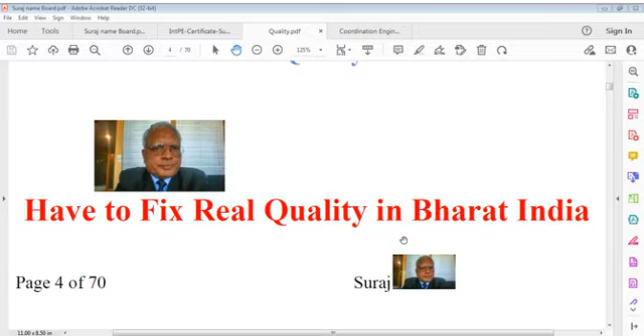And that's what I say. It's not that I'm defining this, you know it very well. I'm just trying to refresh and tell you that it is known, you are forgetting, please don't forget. Fixation of real quality is very important in every country, and we are not remote from others. If we don't keep quality, people would know we are not a quality nation, and there can be no excuse given that we could not do it. This is reason. No other reason plays a role.

Quality is not being produced, I don't know why it's happening. Despite having millions of engineers in our country, quality is not coming out, particularly in production and manufacturing. It may be civil construction, EME construction, digital construction, or whatever - manufacturing of steel, manufacturing of other items or products - there can be no guarantee given to quality. What's happening, how it's happening, why we are not serious - these questions are demanding answers. We are not answering these questions, and that is where we fail.

I simply say no excuse for whatever concession is demanded. There can be no excuse that can be accepted, because quality is a requirement, and quality requirement cannot be compromised. We can't compromise anything just in the name of certain documents we have. We cannot say, 'we have got quality certification and you should accept what I'm saying, what I'm giving you.' That is not acceptable, because I have to be sure with confirmation that the product is a quality one. And if I am not sure, I don't care for your system, because systems are only systems. Systems don't have a living entity. Systems are just referrals. What we are talking of is the living entity in production, in manufacturing.

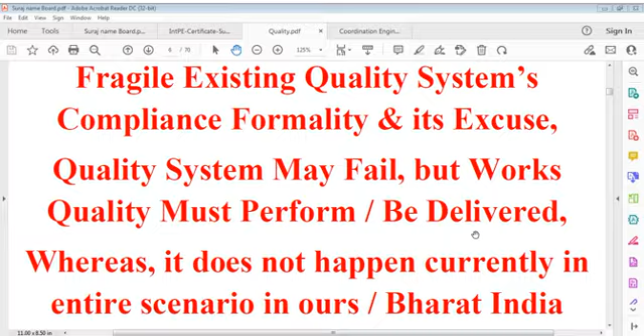When people are careless, there are formations of various lines which may be called red lines. Red lines mean something missing or something being done wrong. We have to do it right, and that's what we say, something should be like that.

Every day I say we have to see, can we know and apply product and works quality standards complied with international standards, or at least our own standards. When we say international standards, this is nothing very extraordinary. Everything is internationalized in this world. We consume products of other countries, and other countries might have consumed our product.

This could happen. People move from one place to another, and the same way commodities move. Same way I worked in many countries because of that reason. Of course it is economical relation, or you can say it is some other relation. We have to move on, we have to move forward.

Then what is the question? Can we work on required coordination, bearing activities to achieve defined or expected quality profile on work? That's the point. Where do we fail? And if we fail, why do we fail? Why don't we control ourselves?

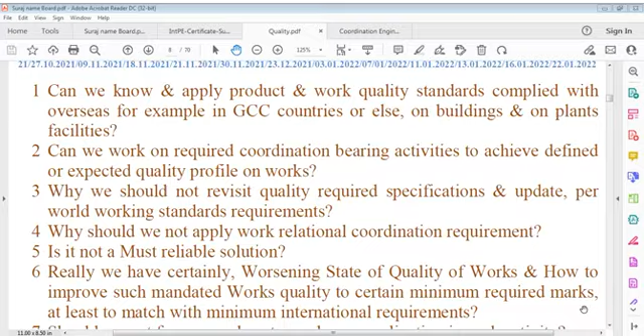Why should we not apply work relational coordination requirements? Why? Question again comes, why? Why should we not apply work relational coordination requirement? Do you think it's not a must? Is it not a requirement? Is it not a reliable solution?

We have certainly a worsening state of quality of works, and how to improve such mandated works quality to certain minimum required marks, at least to match minimum international requirements, or whatever requirements we agree for. We have to force ourselves, should we not? We have to force ourselves to work on coordination in each activity. Is it wrong? Answer yourself. Why is it wrong? Why should it not be done?

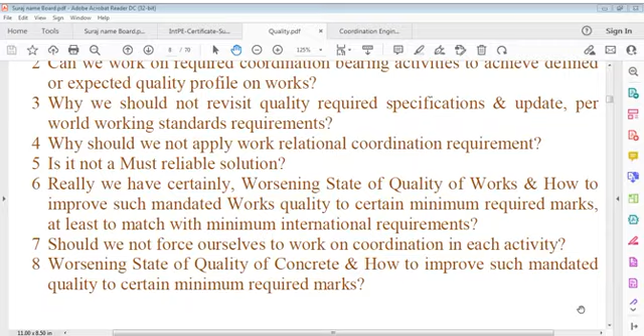Worsening state of quality of concrete, and why don't we do that? Concrete is very important component in construction work, because concrete is important everywhere. Without concrete, no project can be successful, no project can be delivered. That is quality, concrete quality, you may say.

When we say concrete itself, this means strong material, artificial stone you may call it. Concrete component in construction amounts to a major part or major percentage of cost, and for that reason it becomes incumbent on us to care about the quality of such component. Why don't we care about it? Understanding says we have to be very serious in this regard, and we should not avoid its importance.

Worsening state means worsening state of communication, worsening state of coordination. Both jointly lead to a worsening state of quality achievement. That is a very significant point. We have to make ourselves available to think and to consider. That point we have to be very serious about. Why not be serious about that point?

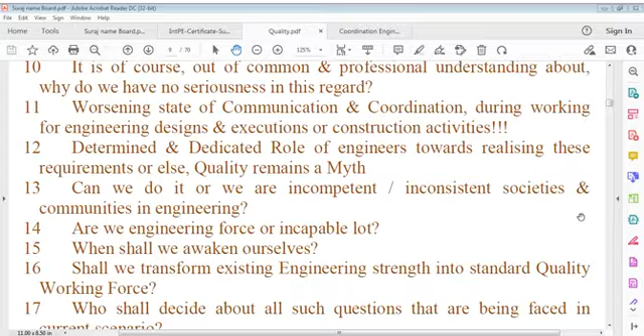Worsening state of communication and coordination during working for engineering designs and executions or construction activities. Determined and dedicated role of engineers towards realizing these requirements, or else quality remains a myth and not a fact, not a realization milestone. Can we do it? Or are we incompetent and inconsistent societies and communities in engineering? We have to think, are we an engineering force or an incapable lot? That is also something we have to decide.

Shall we? Shall we? Shall we do what we say? My point of view is, shall we do what we say, or are we sleeping partners? Can we do it, or are we incompetent, inconsistent societies and communities in engineering? Are we an engineering force or an incapable lot?

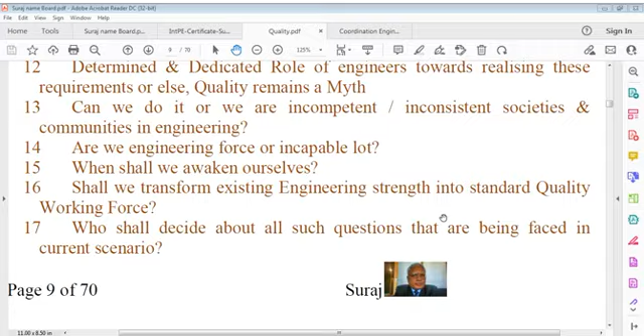Deliberations must happen every time we discuss this; there should be no deficiency, there should be no slack, because deliberation should be continuous. As you know, technologies keep changing, working practices keep changing, and speeds keep changing, but the basics are the same. You have to keep that.

Information must be brought to those personnel who require it. It must be provided at the right time for the right requirement, and duly coordinated. Without coordination, information has got no meaning. It can be an error, or it can cause error on works, and errors are sometimes very expensive and time consuming. These should be avoided.

Dissemination of engineering information about quality requirement and coordination requirement must be clear. The concept should be clear, the requirement should be clear, its methodology should be clear, dissemination of engineering information about quality requirements, and how to transform using method statements.

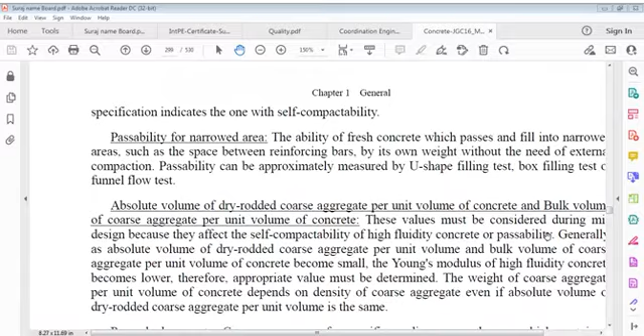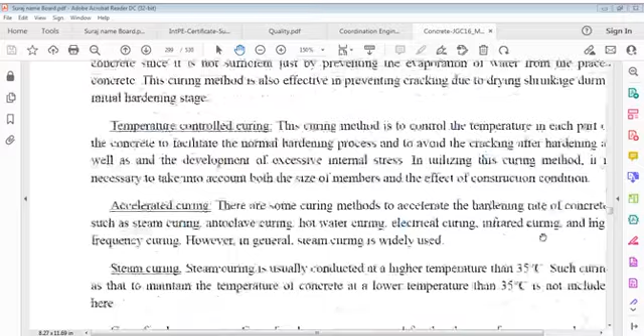Let's have a little revision of 2 or 3 points here. Hot concrete of a temperature of 40 to 60 degrees Celsius is used to place in formwork, and it will be removed from the form in a short time after hard curing - that is called hard concrete. Its temperature range is 40 to 60 degrees Celsius, used to place in a formwork and remove form in a short time after hard curing.

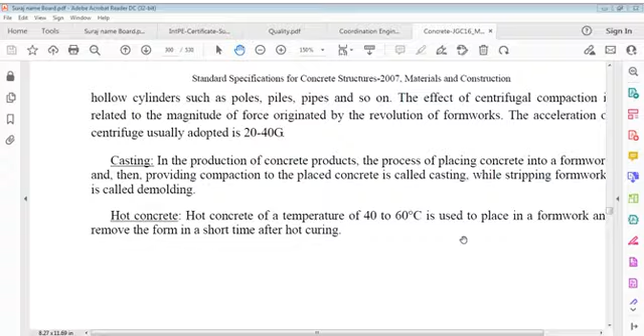Casting in production of concrete products: the process of placing concrete into a formwork and then providing compaction to the placed concrete is called casting, while stripping formworks is called demolding. Again, casting is the production of concrete, the process of placing concrete into formwork and providing compaction to that placed concrete, and removing or stripping the form is called demolding.

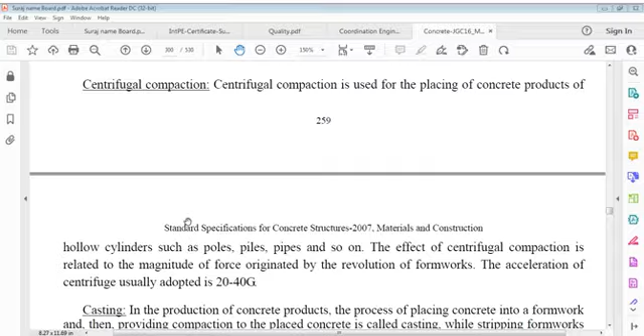Means placing of concrete products of hollow cylinders such as poles, piles, pipes, and so on. Effect of centrifugal compaction is related to magnitude of force originated by revolution of formwork. Acceleration of centrifuge usually adopted is 20 to 40 G.

And then we have steam curing. Steam curing is usually conducted at higher temperature than 35 degrees Celsius. Such curing is that to maintain temperature of concrete at a lower level, lower than 35 degrees Celsius, is not included here, usually higher than 35 degrees.

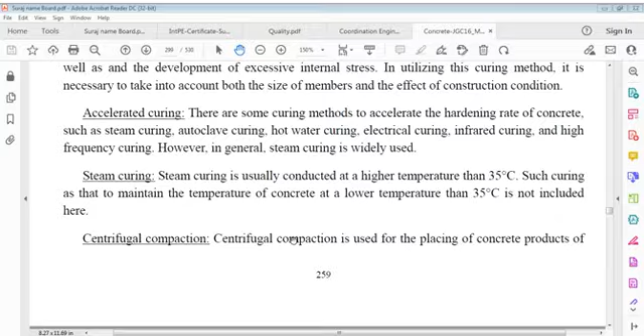Accelerated curing, some curing methods to accelerate hardening rate of concrete, such as steam curing, autoclave curing, hot water curing, electrical curing, infrared curing, and high frequency curing. However, in general, steam curing is widely used.

Temperature control curing. This curing method is to control temperature in each part of concrete to facilitate normal hardening process and to avoid cracking after hardening, as well as development of excessive internal stress. In utilizing this curing method, it is necessary to take into account both size of members and effect of construction condition.

Then we have moist curing. You know it very well. Ensure necessary amount of water for hydration of cement in concrete, since it is not sufficient just by preventing evaporation of water from placed concrete. This curing method is also effective in preventing cracking due to drying shrinkage.

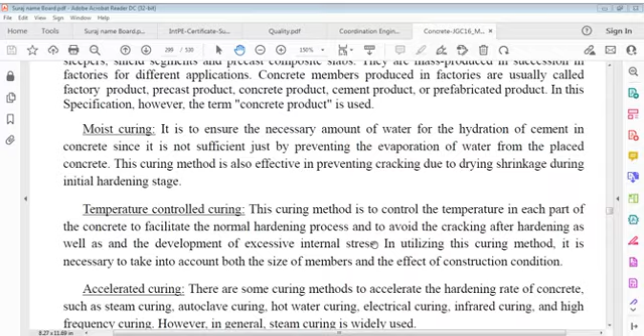Concrete products. Very complex actually. It's not that as we think so.

Concrete products, some examples are Hume pipes, piles, blocks, railroad sleepers, shield segments, and precast composite slabs. They are mass produced in succession in factories for different applications. Concrete members produced in factories are usually called factory product, precast product, concrete product, cement product, or prefabricated product.

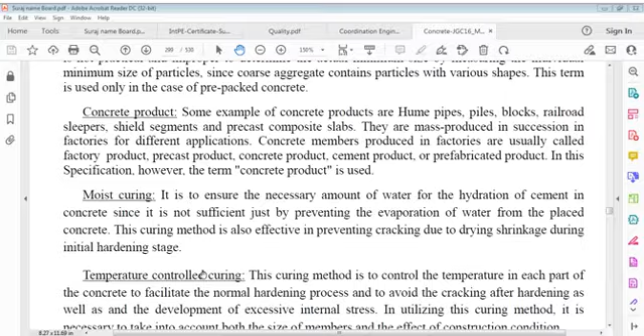In this specific chapter, that is chapter 2, expansive concrete. What is expansive concrete? We have to understand essential matters particularly required for achieving qualities and performances of expansive concrete.

Expansive concretes referred to in this chapter are shrinkage compensating concrete, and is general term for a type of concrete which consists of expansive admixture mixed together with cement, water, fine aggregate, coarse aggregate, and other admixtures, and which possesses volume expansion even after start of hardening.

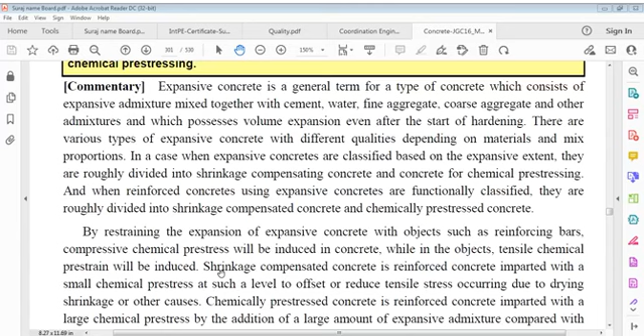There are various types of expansive concrete and different qualities depending on materials and mix proportions. In case when expensive concretes are classified based on expansive extent, roughly divided into shrinkage compensating concrete and concrete for chemical pre-stressing. When reinforced concrete using expansive concretes are functionally classified, these are roughly divided into shrinkage compensated concrete and chemically pre-stressed concrete.

By restraining expansion of expansive concrete with objects such as reinforcing bars, compressive chemical pre-stress shall be induced in concrete, while in objects, tensile chemical pre-strain shall be induced.

Shrinkage compensated concrete is reinforced concrete imparted with small chemical pre-stress at such a level to offset or reduce tensile stress occurring due to drying, shrinkage, or other causes. Chemically pre-stressed concrete is reinforced concrete imparted with a large chemical pre-stress by addition of large amount of expansive admixture compared with that in shrinkage compensated concrete, so that chemical pre-stress remains even when drying shrinkage has been offset.

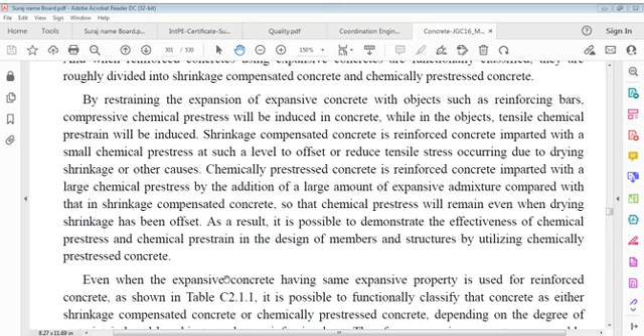It is possible to demonstrate effectiveness of chemical pre-stress and chemical pre-strain in design of members and structures by utilizing chemically pre-stressed concrete. Even when expansive concrete having same expansive property is used for reinforced concrete, it is possible to functionally classify that concrete as either shrinkage compensated one or chemically pre-stressed concrete, depending on degree of restraint induced by objects such as reinforcing bars.

Therefore, expansive concretes are roughly divided into shrinkage compensating concrete and chemical pre-stressing concrete based on expansive capacity, which is totally different from classification based on function.

In chemical pre-stressing concrete, strength loss due to expansive action shall not occur if proper restraining objects are provided. If provisions of restraining objects is improper, strength loss shall occur. In contrast, for shrinkage compensating concrete, expansive admixture is used in such an amount that obtained concrete strength is almost equal to that of concrete with same water binder ratio and without expansive admixture in mix proportion.

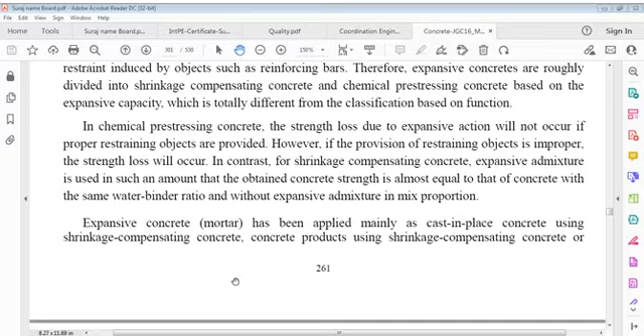Expansive concrete mortar has been applied mainly as cast in situ, cast in place concrete using shrinkage compensating concrete or chemical pre-stressing concrete, various fill concrete and mortar for filling voids in inverse lining or below bridge bearing. Chemical pre-stressing concrete is also used for cast in place concrete.

When using expansive concrete, materials, mixed proportions, production methods, quality management methods, and construction methods should be determined so as to produce the designated quality.

Expansivity of expansive concrete varies according to the type of expansive admixture or cement used, the amount of expansive admixture per unit volume of concrete, age, curing methods, environment of the structure, and dimensions of the member cross section. Performance requirements for expansive concrete vary according to whether shrinkage compensating or chemical pre-stressing concrete is used.

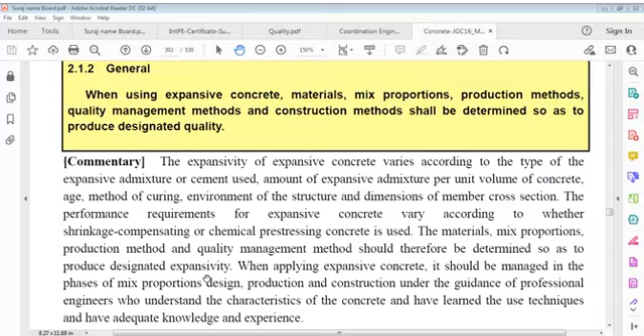Materials, mixed proportions, production methods, and quality management methods should therefore be determined so as to produce the designated expansivity. When applying expansive concrete, it should be managed in phases of mix proportion design, production, and construction under the guidance of professional engineers who understand the characteristics of concrete and have adequate knowledge and experience.

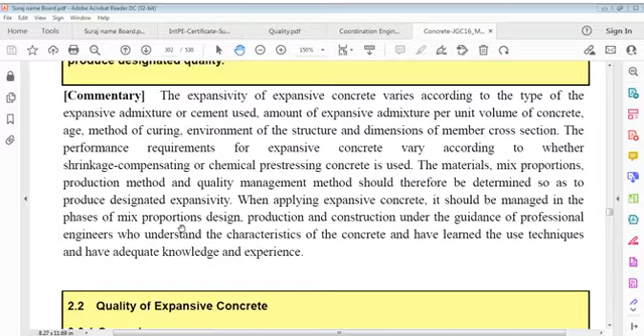Quality of expansive concrete: expansive concrete shall meet performance requirements in terms of workability, strength, expansivity, durability, water tightness, and steel protection. Variations of quality shall be minimized.

Expansive concrete, as well as ordinary concrete, should have designated workability and expansivity with minimum variations. Variations of expansivity may prevent shrinkage compensation or application of chemical pre-stress from producing an intended effect, or lead to strength reduction due to excessive expansion. Quality of expansive concrete should therefore be fully managed.

Expansivity of expansive concrete should be expressed as a rate of expansion obtained in accordance with JIS A 6202. The test value at an age of 7 days shown in the attachment should be used as the standard value. The standard range of expansion coefficient of expansive concrete is shown.

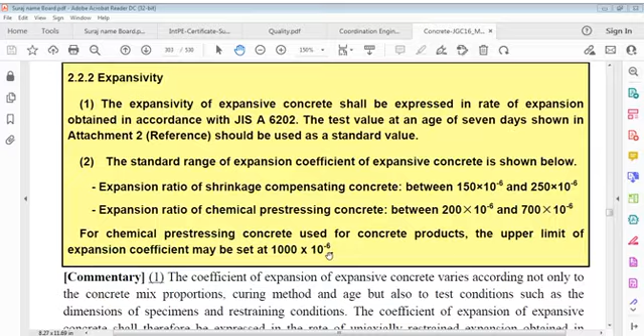For chemical pre-stressing concrete used in concrete products, the upper limit of the expansion coefficient may be set at 1000 into 10 to the power minus 6.

Coefficient of expansion of expansive concrete varies not only according to concrete mix proportions, curing methods, and age, but also to test conditions such as dimensions of specimen and restraining condition. Coefficient of expansion of expansive concrete shall therefore be expressed as the rate of uniaxially restrained expansion.

Coefficient of expansion of expansive concrete varies according not only to concrete mix proportions, curing method, and age, but also to test conditions such as dimensions of specimen and restraining conditions. Coefficient of expansion of expansive concrete should therefore be expressed as the rate of uniaxially restrained expansion obtained in accordance with the attachment.

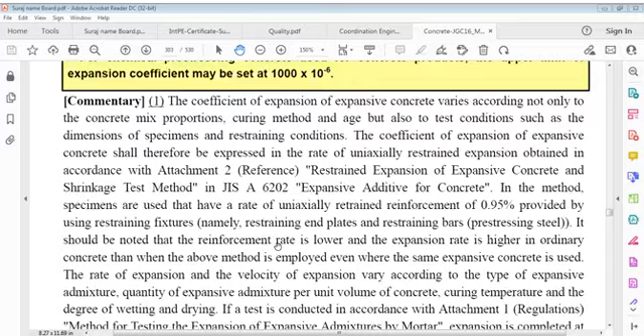It should be noted that the reinforcement rate is lower and the expansion rate is higher in ordinary concrete than when this method is employed, even where the same expansive concrete is used.

Rate of expansion and velocity of expansion vary according to the type of expansive admixture, the quantity of expansive admixture per unit volume of concrete, curing temperature, and degree of wetting and drying.

If a test is conducted in accordance with the attachment method for testing expansion of expansive admixtures by mortar, expansion is completed at an age of 7 days. The rate of expansion is therefore expressed as the uniaxially restrained expansion rate at an age of 7 days.

Also, if a test is conducted in accordance with the Attachment 1 method for testing expansion of expansive admixtures by mortar, expansion is completed at an age of 7 days. The rate of expansion is therefore expressed as the uniaxially restrained expansion rate at an age of 7 days.

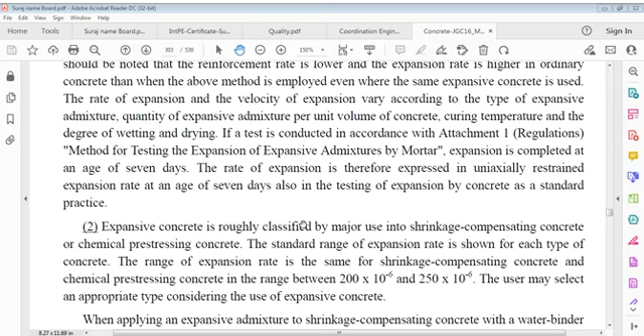Also in testing of expansion by concrete as a standard practice, expansive concrete is roughly classified by major use into shrinkage compensating concrete or chemical pre-stress concrete. The standard range of expansion rate is shown for each type of concrete.

The range of expansion is the same for shrinkage compensating concrete and chemical pre-stressing concrete, in the range between 200 into 10 to the power minus 6 and 250 into 10 to the power minus 6. The user may select an appropriate type considering the use of expansive concrete.

When applying an expansive admixture to shrinkage compensating concrete with a water binder ratio of 30% or lower, such as high strength concrete and high fluidity concrete, expansion may be controlled at an early age because of lack of water required for hydration of the expansive admixture.

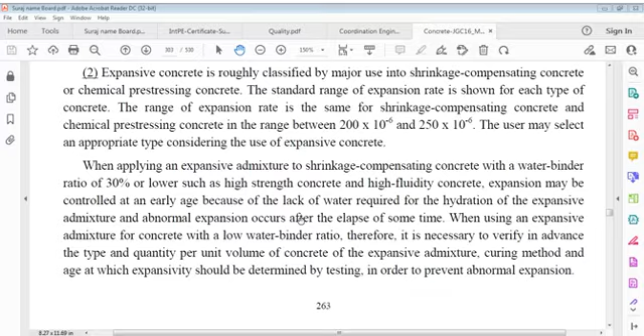In chemical pre-stressing concrete, inappropriate arrangement of reinforcing bars or steel pipes for restraining expansion not only prevents development of effective chemical pre-stress but also deteriorates quality of the expansive concrete.

What does it say? In chemical pre-stressing concrete, inappropriate arrangement of reinforcing bars or steel pipes for restraining expansion.

In chemical pre-stressing concrete, inappropriate arrangement of reinforcing bars or steel pipes for restraining expansion not only prevents development of effective chemical pre-stress but also deteriorates quality of the expansive concrete.

Area and arrangement of reinforcing bars when using chemical pre-stressing concrete should be determined considering expansivity of concrete, type of structure, characteristics of loads, dimensions of members, and construction method.

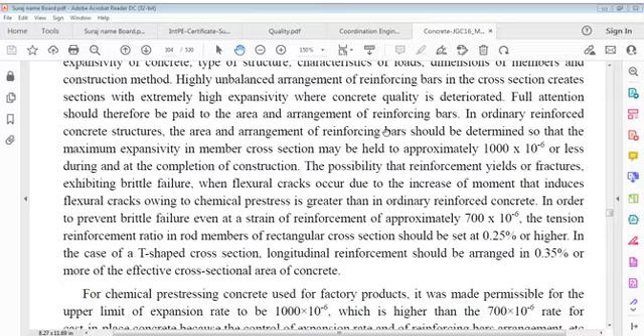In order to prevent brittle failure even at strain of reinforcement of approximately 700 times 10 to the power minus 6, tension reinforcement ratio in members of rectangular cross section should be 0.25% or higher. In case of T-shaped cross section, longitudinal reinforcement should be arranged in 0.35% or more of effective cross-sectional area of concrete.

For chemical pre-stressing concrete used for factory products, it was made permissible for the upper limit of expansion rate to be 1000 times 10 to the power minus 6, which is higher than the 700 times 10 to the power minus 6 rate for cast-in-place concrete, because control of expansion rate and of reinforcing bar arrangement, etc. on factory products is superior compared to other cast-in-place methods.

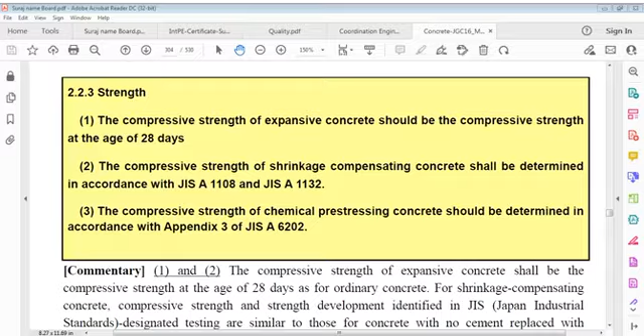Compressive strength of expansive concrete should be compressive strength at age of 28 days. Compressive strength of shrinkage compensating concrete and chemical pre-stressing should be determined in accordance with this, as compressive strength at age of 28 days, as for ordinary concrete.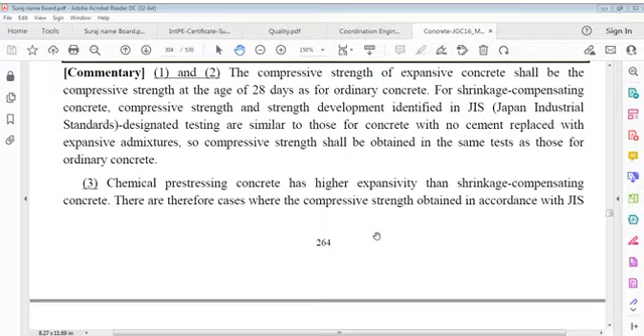For shrinkage compensating concrete, compressive strength and strength development designated to testing similar to those for concrete with no cement replaced with expansive admixtures. So compressive strength shall be obtained in same tests as those for ordinary concrete. Chemical prestressing concrete has higher expansivity than shrinkage compensating concrete.

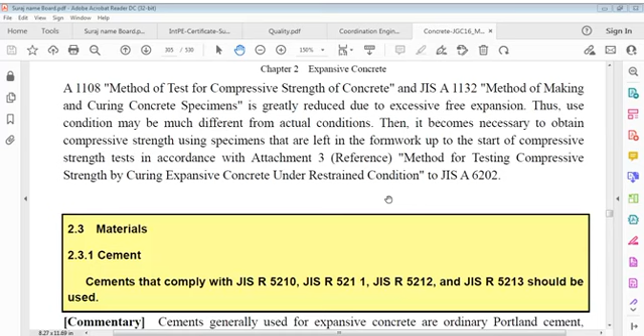There are cases where compressive strength obtained in accordance with method of test for compressive strength of concrete, method of making and curing concrete specimen, is greatly reduced due to excessive free expansion. Thus, use condition may be much different from actual conditions. It becomes necessary to obtain compressive strength using specimens that are left in formwork up to start of compressive strength tests in accordance with method of testing compressive strength.

Cements that comply with this requirement. Cements generally used for expansive concrete are ordinary Portland cement, moderate heat Portland cement, and high early strength Portland cement, fly ash cement type B, and blast furnace slag cement type B.

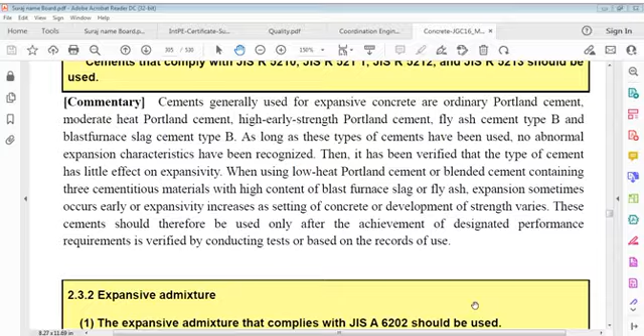These cements should therefore be used only after achievement of designated performance requirements is verified by conducting tests or based on records of use.

Expansive admixture that complies with this used. When using other expansive admixtures than those described above, their quality shall be verified and methods of use should be fully examined. Expansive admixtures shall be stored so as to maintain quality.

Expansive admixtures used for expansive concrete are divided into two major types according mainly to chemical composition: calcium sulfoaluminate, CSA type, and calcareous type, that is CaO type. In shrinkage compensating concrete using these types of admixtures, quantity of expansive admixtures per unit volume of concrete has conventionally been set to 30 kg per meter cube as standard.

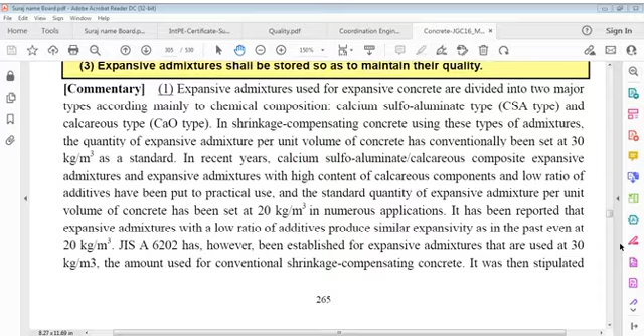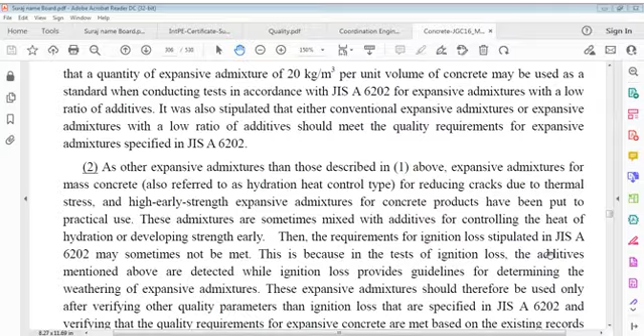It has been reported that expansive admixtures with a low ratio of additives produce similar expansivity as in the past, even at 20 kg per meter cube. However, it being established for expansive admixtures that are used at 30 kg per meter cube, the amount used for conventional shrinkage compensating concrete, it was stipulated that quantity of expansive admixture of 20 kg per meter cube per unit volume of concrete may be used as a standard when conducting tests for expansive admixtures with a low ratio of additives. It is also stipulated that either conventional expansive admixtures or expansive admixtures with a low ratio of additives should meet quality requirements for expansive admixtures.

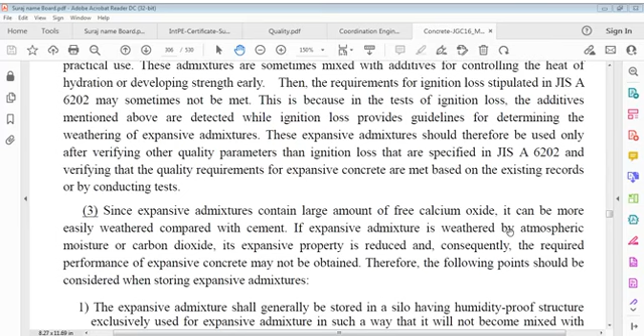Requirements for ignition loss stipulated may sometimes not be met. This is because in tests of ignition loss, additives mentioned above are detected, while the ignition loss provides guidelines for determining weathering of expansive admixtures. Expansive admixtures should therefore be used only after verifying quality parameters other than ignition loss, and verifying that quality requirements of expansive concrete are met based on existing records.

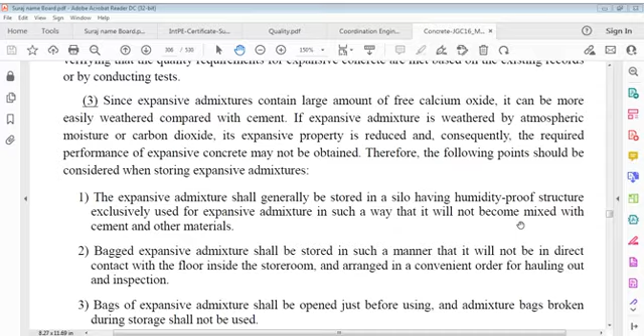Since expansive admixtures contain a large amount of free calcium oxide, they can be more easily weathered compared with cement. If an expansive admixture is weathered by atmospheric moisture or carbon dioxide, its expansive property is reduced, and consequently required performance of expansive concrete may not be obtained. Following points should be considered when storing expansive admixture. Expansive admixture shall generally be stored in a silo having humidity-proof structure, exclusively used for expansive admixture, in such a way that it shall not become mixed with cement and other materials. Bagged expansive admixture shall be stored in such a manner that it shall not be in direct contact with the floor, inside a storeroom, and arranged in a convenient order for hauling out and inspection. Bags of expansive admixture shall be opened just before using, and admixture bags broken during storage shall not be used. If storage period is relatively long, tests shall be performed before using.

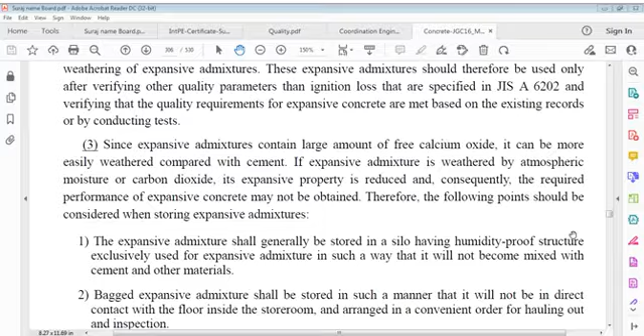Since expansive admixtures contain a large amount of free calcium oxide, they can be more easily weathered compared with cement. Expansive admixture is weathered by atmospheric moisture or carbon dioxide, its expansive property is reduced, and consequently required performance of expansive concrete may not be obtained. That's why following points should be considered. Expansive admixture shall be stored in a silo having humidity-proof structure, exclusively used for expansive admixture, in such a way that it shall not become mixed with cement or other materials. Bagged expansive admixture shall be stored in such a manner that it shall not be in direct contact with the floor, inside a storeroom, and arranged in a convenient order for hauling out and inspection. Bags of expansive admixture shall be opened just before using, and admixture bags broken during storage shall not be used. If storage period is relatively long, tests shall be performed before using, to confirm all required properties.

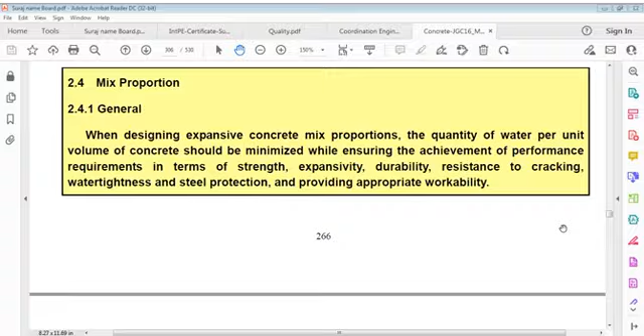Mix proportion: when designing expansive concrete mix proportions, quantity of water per unit volume of concrete should be minimized while ensuring achievement of performance requirements in terms of strength, expansivity, durability, resistance to cracking, water tightness, and steel protection, and providing appropriate workability. It's extremely important to minimize quantity of water per unit volume of expansive concrete as long as designated performance requirements are met, as for ordinary concrete.

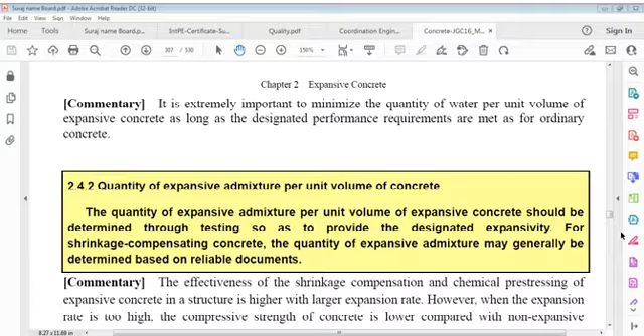Quantity of expansive admixture per unit volume of concrete should be determined through testing so as to provide designated expansivity for shrinkage compensating concrete. Quantity of expansive admixture may generally be determined based on reliable documents. Effectiveness of shrinkage compensation and chemical pre-stressing of expansive concrete in a structure is higher with larger expansion rate. However, when expansion rate is too high, compressive strength of concrete is lower compared with non-expansive concrete of the same mix proportions. That's why it's important to find an appropriate range of expansion rate within which strength declination does not occur.

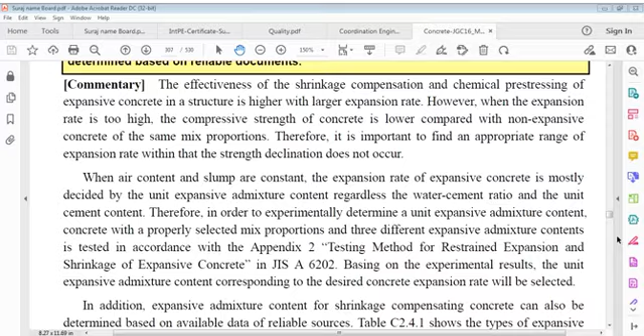When air content and slump are constant, expansion rate of expansive concrete is mostly decided by unit expansive admixture content, regardless of water cement ratio and unit cement content. In order to experimentally determine unit expansive admixture content, concrete with properly selected mix proportions and 3 different expansive admixture contents should be tested using the testing method for restrained expansion and shrinkage of expansive concrete. Based on experimental results, unit expansive admixture content corresponding to desired concrete expansion is to be selected. In addition, expansive admixture content for shrinkage compensating concrete can also be determined based on available data from reliable sources.

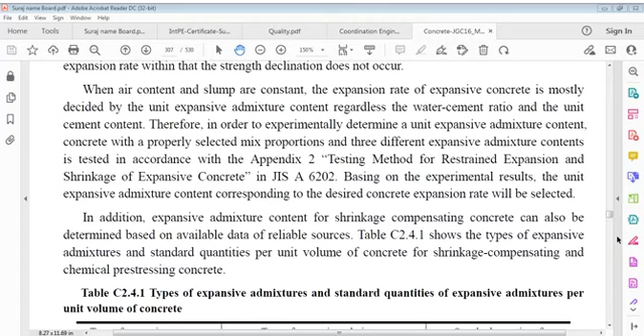Expansive admixture standard quantities per unit volume of concrete for shrinkage compensating and chemical pre-stressing concrete. Type of expansive admixtures and standard quantities of expansive admixtures per unit volume of concrete.

There is type of expansive concrete, column 1: type of expansive admixture for ordinary concrete for conventional type, and standard quantity of expansive admixture.

Type of expansive concrete includes shrinkage compensating concrete and chemical pre-stress concrete. In shrinkage compensating concrete, expansive admixture for ordinary concrete is conventional type with low ratio of additives. For mass concrete, it is also conventional type with low ratio of additives.

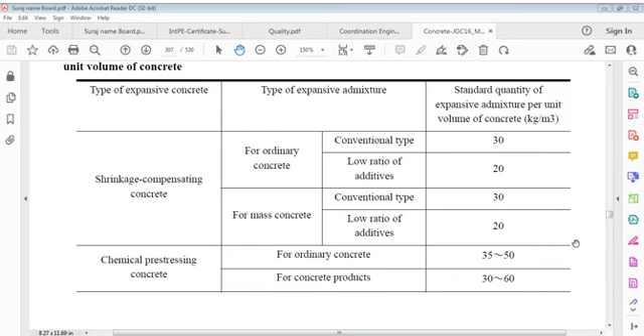Standard quantity of expansive admixture per unit volume of concrete, in kilogram per meter cube: for ordinary concrete, 30 kg for conventional type, and 20 kg for lower ratio of additives. For mass concrete, conventional type is 30 kilogram per meter cube and low ratio of additive is 20 kilogram per meter cube. For chemical pre-stressed concrete, ordinary concrete requires 35 to 50 kilogram per cubic meter, and for concrete product it can be 30 to 60.

Quantity of cement per unit volume of concrete. Standard quantity of cement per unit volume of expansive concrete should be 260 kg per meter cube or larger.

Strength and rate of expansion of expansive concrete are determined by...

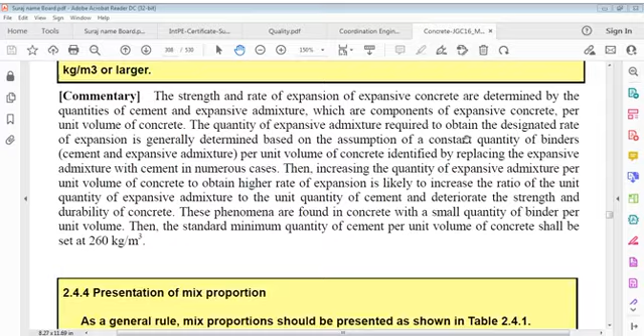Increasing quantity of expansive admixture per unit volume of concrete to obtain higher rate of expansion is likely to increase ratio of unit quantity of expansive admixture to unit quantity of cement and deteriorate strength and durability of concrete. These phenomena are found in concrete with a small quantity of binder per unit volume. Standard minimum quantity of cement per unit volume of concrete shall be set at 260 kg per meter cube.

Presentation of mix proportion. As a general rule, mixed proportions should be presented, representing the mixed proportion, including maximum size of coarse aggregate.

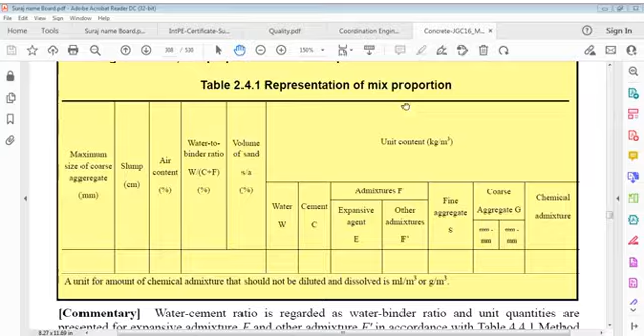Slump, air content, water binder ratio W over C plus F (cement plus F), percentage, volume of sand (sand aggregate percentage), unit content in kilogram per meter cube: water W, cement C, admixture F, expansive agent E, other admixtures F, fine aggregate S, coarse aggregate G in mm, and chemical admixtures. Unit for amount of chemical admixture that should not be diluted and dissolved is milliliter per meter cube or gram per meter cube.

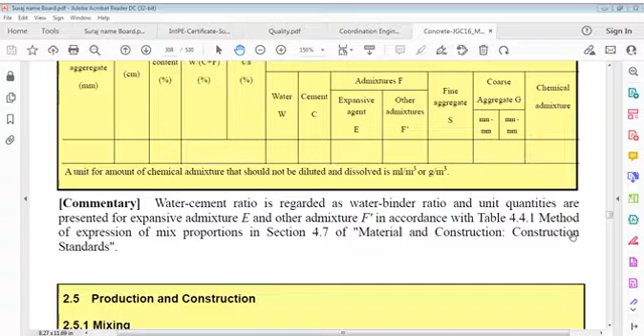In accordance with the table and method of expression of mixed proportions of material, construction standards require mixers with designated mixing capability to be used as a standard practice. The method for putting expansive admixtures into the mixer and the mixing time should be determined by testing so that concrete may meet designated quality requirements. This method and mixing time may be determined based on reliable documents or records whenever available.

If mixing of expansive admixture is insufficient, although admixtures are accurately measured and input, expansive admixtures may sometimes be distributed unevenly in concrete and form masses, or be provided in excessive quantities in some sections. Strength of concrete may be reduced after hardening, or expansion failure may occur locally. For mixing, therefore, mixers specified in materials and construction standards should be used as a standard practice so that expansive admixtures or other concrete materials may be distributed fully evenly.

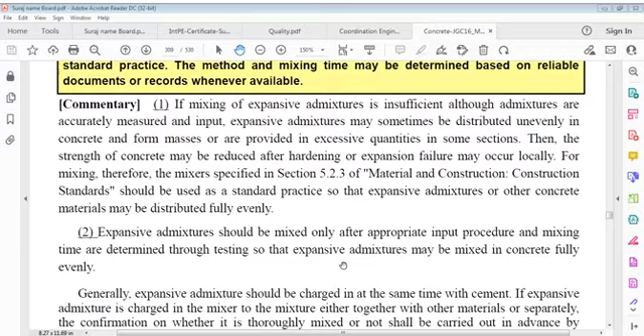Repeating: if mixing of expansive admixture is insufficient, even though admixtures are accurately measured and input, expansive admixtures may be distributed unevenly in concrete, forming masses, or provided in excessive quantities in some sections. Strength of concrete may be reduced after hardening, or expansion failure may occur locally. The mixer specified in materials and construction standards should be used. Expansive admixtures should be mixed only after an appropriate input procedure, and the mixing time determined through testing, so that expansive admixtures may be mixed in concrete fully evenly.

Generally, expansive admixture should be charged at the same time as cement. If expansive admixture is charged into the mixer, either together with other materials or separately, confirmation of whether it is thoroughly mixed shall be carried out in advance by experiments.

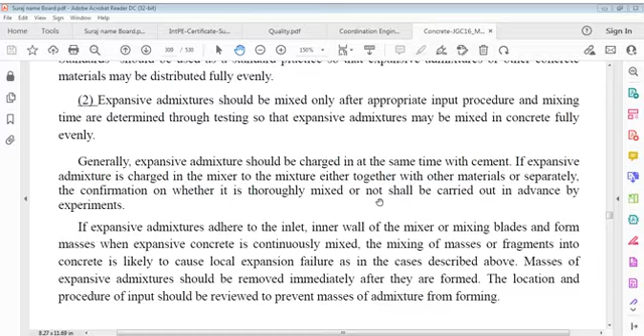If expansive admixtures adhere to the inner wall of the mixer or mixing blades and form masses when expansive concrete is continuously mixed, mixing of these masses or fragments into concrete is likely to cause local expansion failure, as in cases described above. Masses of expansive admixtures should be removed immediately after they are formed, and the location and procedure of input should be reviewed to prevent masses of admixture from forming.

Repeating: if expansive admixture adheres to the inner wall of the mixer or mixing blades and forms masses when expansive concrete is continuously mixed, mixing of these masses or fragments into concrete is likely to cause local expansion failure, as described above. Masses of expansive admixtures should be removed immediately after they are formed, and the location and procedure of input should be reviewed to prevent masses of admixture from forming.

Curing: expansive concrete should be maintained in a moist condition at all times for at least 5 days after placement.

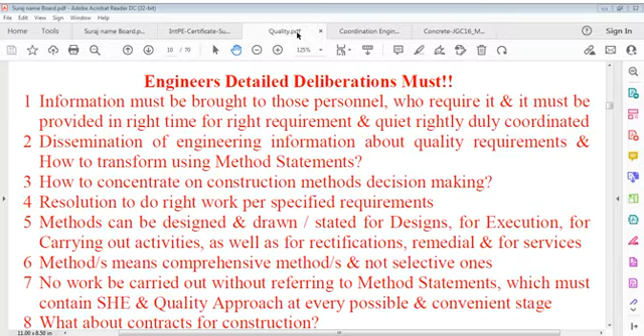In cases when steam curing or other accelerated curing methods are used, a test should be carried out to ensure in advance that the required quality can be obtained through considering the curing method.

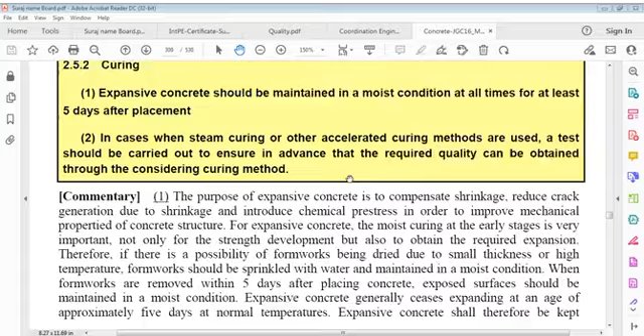The purpose of expansive concrete is to compensate shrinkage, reduce crack generation due to shrinkage, and introduce chemical pre-stress in order to improve mechanical properties of concrete structures.

For expansive concrete, moist curing at early stages is very important, not only for strength development but also to obtain required expansion. Therefore, if there is a possibility of formwork drying due to small thickness or high temperature, formwork should be sprinkled with water and maintained in a moist condition. When formworks are removed within 5 days after placing concrete, exposed surfaces should be maintained in a moist condition. Expansive concrete generally ceases expanding at an age of approximately 5 days at normal temperature.

Expansive concrete shall therefore be kept constantly wet for at least 5 days after placement as a standard practice. If shoring is removed within 5 days of placement, wetting of the concrete is required, such as spraying water on the exposed surface or laying a curing membrane over the concrete. When special curing methods such as steam curing, insulated curing, or heating are applied, it is important to confirm in advance by experiments that the required properties of concrete shall be satisfied.

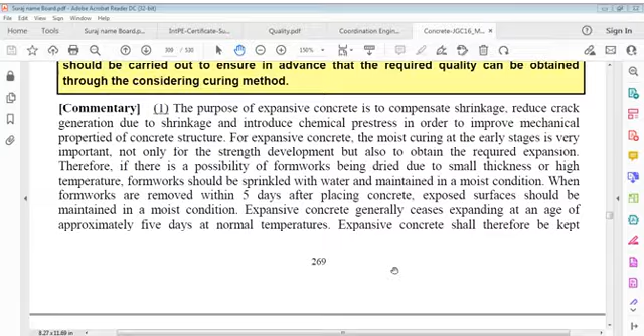When formworks are removed within 5 days after placing concrete, exposed surfaces should be maintained in a moist condition. Expansive concrete generally ceases expanding at an age of approximately 5 days at normal temperature, and shall therefore be kept constantly wet for at least 5 days after placement as a standard practice.

If shoring is removed within 5 days of placement, wet curing is required, such as spraying water on exposed surfaces or laying curing membrane over concrete. If special curing methods such as steam curing, insulated curing or heating are applied, it is important to confirm in advance by experiments that required properties of concrete shall be satisfied.

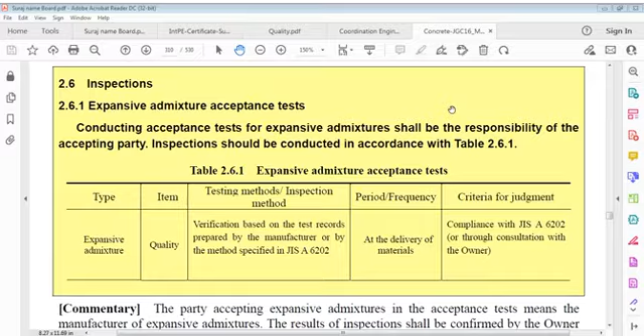Now we're talking of inspections, and this is expansive admixture acceptance test. Conducting acceptance tests for expansive admixtures shall be the responsibility of the accepting party. Inspection should be conducted in accordance with this table.

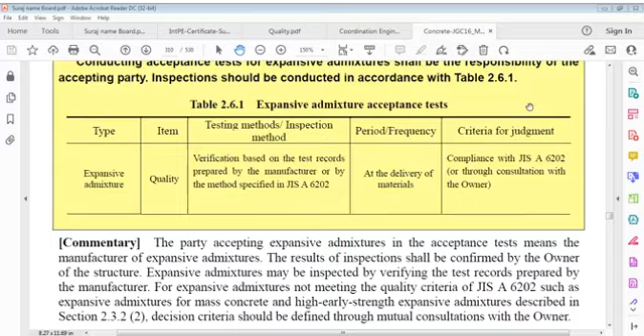Expansive admixture acceptance test: Type is expansive admixture. Item is quality. Testing method or inspection method is verification based on test records prepared by manufacturer. Period or frequency is delivery of material. Criteria for judgment is whatever it is. Party accepting expansive admixtures...

Party accepting expansive admixtures in acceptance tests means manufacturer of expansive admixtures. Results of inspections should be confirmed by an engineer or owner. Expansive admixtures may be inspected by verifying test records prepared by manufacturer.

For expansive admixtures not meeting quality criteria, such as expansive admixtures for mass concrete and high strength expansive admixtures described, decision criteria should be defined through mutual consultation.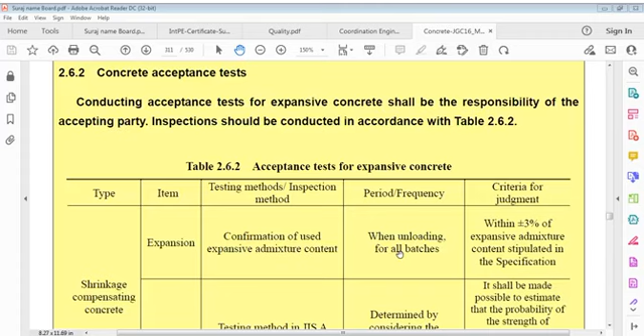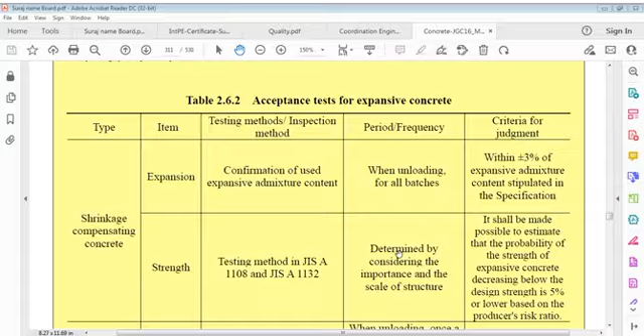Concrete acceptance test. Conducting acceptance tests for expansive concrete shall be the responsibility of the accepting party. Inspection should be conducted in accordance with acceptance test of expansive concrete: type, item, testing methodology or method, inspection method, period or frequency, criteria judgment. First is shrinkage compensating concrete, then chemical pre-stressing concrete.

In shrinkage compensating concrete, item is expansion and strength. In expansion, testing method per inspection method is confirmation of used expansive admixture content, and for strength there is a strength testing method. Period frequency is, in expansion, when unloading for all batches, and for strength determined by considering importance and scale of structure.

Judgment is within plus minus 3% of expansive admixture content stipulated in the specifications, and for strength it shall be made possible to estimate that probability of strength of expansive concrete decreasing below design strength is 5% or lower based on producer's risk ratio.

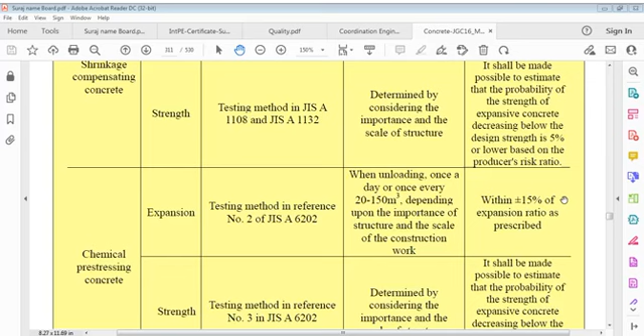Other is expansion, that is pre-stressing within 15%. We must correspond to 15% of expansion ratio. Testing method for chemical pre-stressing concrete expansion is when unloading once a day, or once every 20 to 150 cubic meters, depending upon importance of structure and scale of construction, within plus minus 15% of expansion ratio as prescribed.

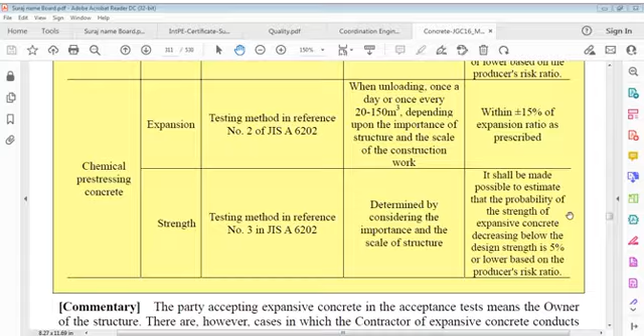Strength is determined by considering importance and scale of structures. It shall be possible to estimate that probability of strength of expansive concrete decreasing below design strength is 5% or lower based on producer's risk ratio. So, result commentary: party accepting expansive concrete.

Party accepting expansive concrete in acceptance test means owner of the structure. There are, however, cases in which contractors of expansive concrete conduct tests and owner confirms.

In design of mixed proportions of expansive concrete, it has been verified that rate of expansion of expansive concrete is nearly proportional to quantity of expansive admixture per unit volume of concrete. Inspection of expansion for shrinkage compensating concrete can be replaced by confirming expansive admixture content in mixed proportions record when concrete is unloaded at construction site.

Meaning of when unloading for all batches is that confirmation must be made if fluctuation of expansive admixture content in all mixing batches is within plus minus 3% of content stipulated in specified mix proportion, when concrete is unloaded from agitator trucks to site.

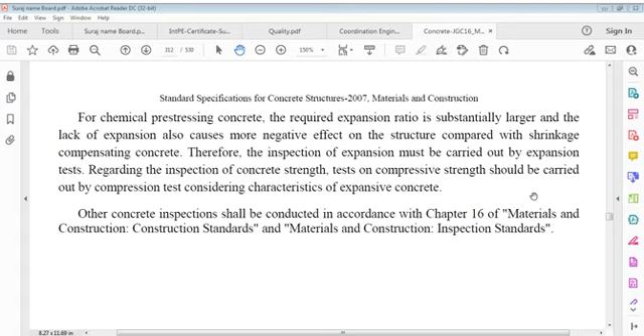Therefore, inspection of expansion must be carried out by expansion tests. Regarding inspection of concrete strength, tests on compressive strength should be carried out by compression test considering characteristics of expansive concrete. Other concrete inspections shall be conducted in accordance with materials and construction inspection standards.

Lightweight aggregate concrete. You know lightweight. What is lightweight? Everybody knows. It's very common. Lightweight is very common, and you know that.

This chapter specifies standards on essential matters, particularly required for construction of lightweight aggregate concrete.

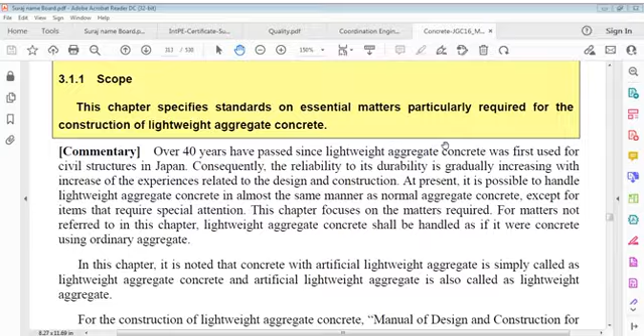Over 40 years have passed since lightweight aggregate concrete was first used for civil structures in Japan. Consequently, reliability to its durability are gradually increasing with increase of experience related to design and construction. At present, it is possible to handle lightweight aggregate concrete in almost the same manner as normal aggregate concrete, except for items that require special attention.

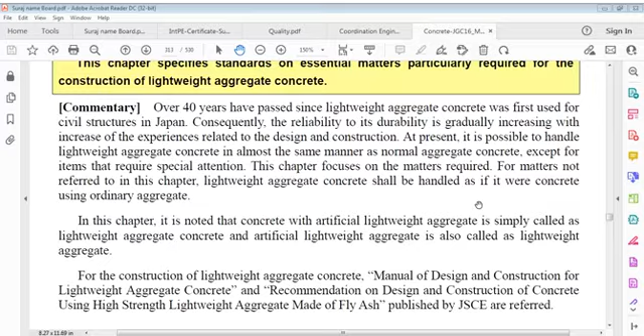When constructing lightweight aggregate concrete, qualities of lightweight aggregate and of lightweight aggregate concrete shall be fully examined so as to meet designated performance requirements. Basic matters to be considered when using lightweight aggregate concrete are described.

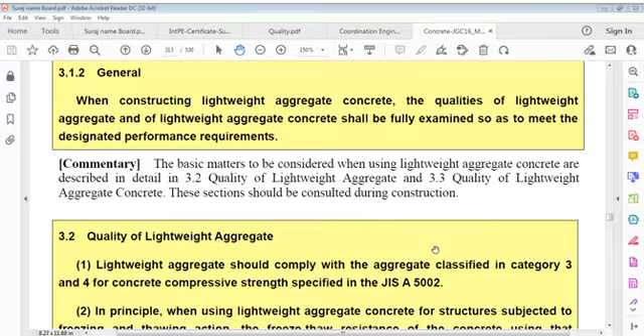Quality of lightweight aggregate concrete: this section should be consulted during construction. Lightweight aggregate should comply with aggregate classification.

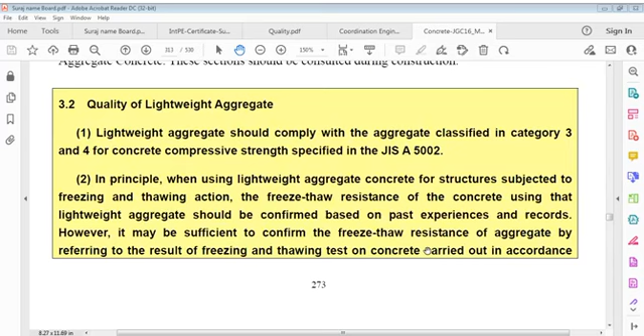In principle, when using lightweight aggregate concrete for structures subject to freezing and thawing action, freeze-thaw resistance of concrete using that lightweight aggregate should be confirmed based on past experience and records. However, it may be sufficient to confirm freeze-thaw resistance of aggregate by referring to results of freezing and thawing tests on concrete carried out in accordance with standard methods. Whether alkali silica reaction of lightweight aggregate occurs or not shall be verified based on use records or in concrete prism tests.

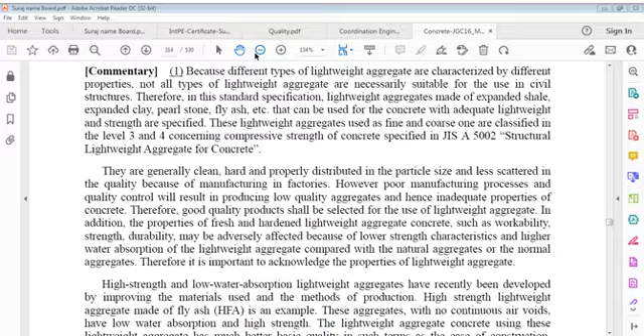a structural lightweight aggregate for concrete. They are generally clean, hard and properly distributed in particle size, and less scattered in quality because of manufacturing in factories. However, poor manufacturing processes and quality control will result in producing low quality aggregate and inadequate properties of concrete. Therefore, good quality products shall be selected for use as lightweight aggregate.

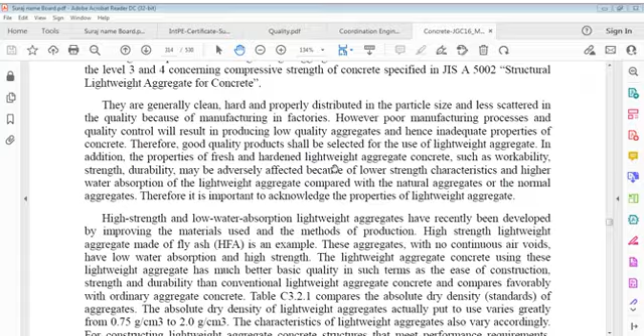In addition, properties of fresh and hardened lightweight aggregate concrete such as workability, strength, and durability may be adversely affected because of lower strength characteristics and higher water absorption of lightweight aggregate compared with natural or normal aggregate. Therefore, it is important to acknowledge the properties of lightweight aggregate.

High strength and low water absorption lightweight aggregates have recently been developed by improving materials used and methods of production. High strength lightweight aggregate made by fly ash, HFA, is an example. These aggregates, with no continuous air voids, have low water absorption and high strength.

Lightweight aggregate concrete using these lightweight aggregates has much better basic quality in terms such as ease of construction, strength and durability than conventional lightweight aggregate concrete, and compares favorably with ordinary aggregate concrete.

This table compares absolute dry density standards of aggregates. Absolute dry density of lightweight aggregates actually put to use varies greatly, from 0.75 gram per centimeter cube to 2 gram per centimeter cube. Characteristics of lightweight aggregate also vary accordingly. For constructing lightweight aggregate concrete structures that meet performance requirements, aggregates should be selected that are fit for use, and construction should be carried out considering the quality of aggregate.